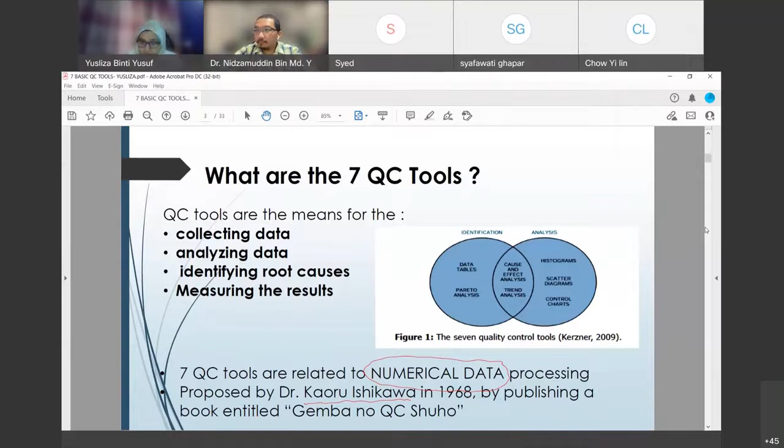If we look at the history of these 7 QC tools, they were proposed by a Japanese, Dr. Kaoru Ishikawa, in 1968. Dr. Kaoru proposed these 7 QC tools in his book, Gemba no QC Shuho. Based on this book, he proposed the 7 QC tools to be used and practiced by Japanese firms at that time.

So for today, the 7 basic QC tools we will go through are: first, check sheet; then histogram; number 3 is Pareto analysis, sometimes also called a Pareto diagram; number 4, the most popular, is the fishbone diagram, also known in some books as the cause and effect diagram; followed by the scatter diagram, also known as scatter plot, flow chart, and control chart. This is the basic 7 QC tools introduced by Dr. Kaoru. For this 1 hour, I would like to share what each of these tools means and how we can use them to help solve problems in industry.

So we start with the check sheet. Even though we say it's only a check sheet, a very simple check sheet, for me it is a very valuable tool for us to dig information from our production line. If you are involved in developing a check sheet to monitor, check quality, or perform any study, please do a proper study to create a very good check sheet so that we can have so much information from it. We can easily get information based on the check sheet if we properly design it to collect the data.

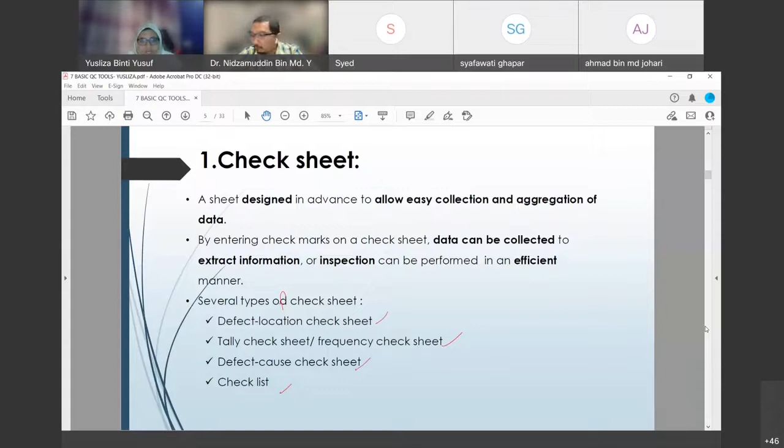So the inspector, when doing the inspection, when he finds a defect, he just puts a sticker or any shape to identify each of the defects on the check sheet given.

So you can see how easy it is for us to get information about the current production status and performance of producing the part based on the check sheet, if we have this kind of check sheet. It depends on the suitable environment and the parts of the product we produce.

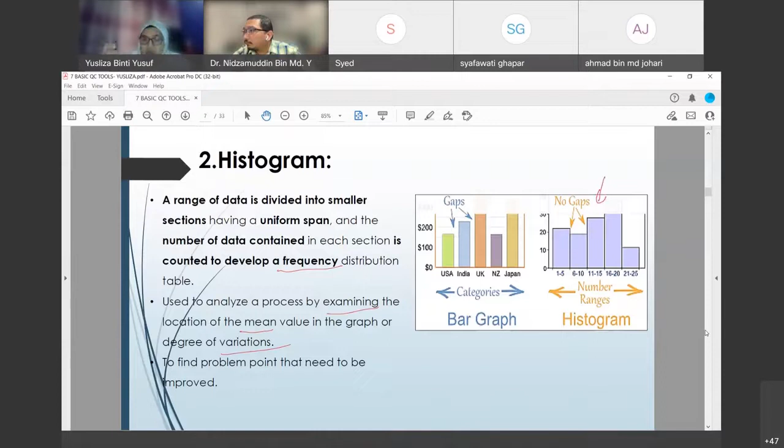We can see that the histogram is different from the bar graph, because histogram refers to the number of ranges on the x-axis, compared to the bar graph which is based on category on the x-axis. So when we plot the histogram, how it will look will totally be influenced by our data itself.

Okay, so as I said just now, we construct the histogram to monitor where the mean value is and to know what is...

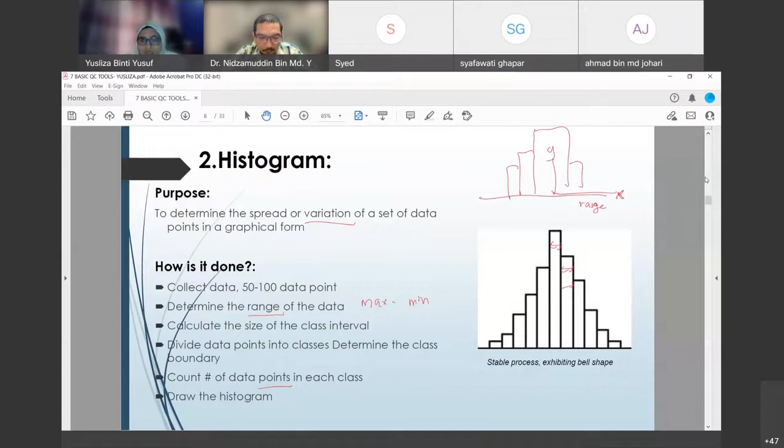So what are the benefits and the input we can get when we draw the histogram? We can glance at the variation, as I said before, because we want to reduce or minimize the variation. Based on that, we can also know our process behavior based on the shape of the histogram we have. Maybe this kind of shape, for this we have two peaks, so we call it a bimodal type of histogram, because the shape and size of the histogram will help us identify whether there is any hidden source of variation or not. From that, when we have the information based on the data we have, we can start the improvement activity to do the process improvement in our production line.

So for histogram, the ideal one should have a bell curve, bentuk macam ni kan, bell curve. The center of the histogram, the value of the mean, must also equal the median value. So that we consider as a stable or balanced histogram, which we call a unimodal histogram.

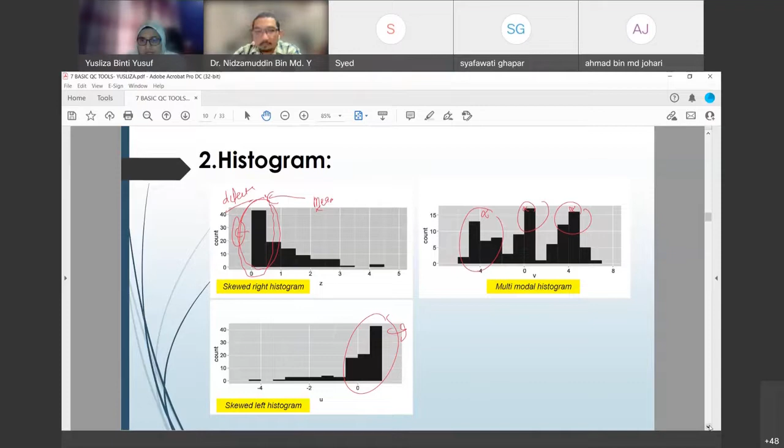Okay, so the third one is the Pareto analysis, or the Pareto diagram.

Dr. Nizam, I think we have a question in the chat. Should I answer right now or after this? Oh, okay. Actually, both ways. I don't want to disturb your presentation, but since it's already on the topic now, one of the questions is: is Minitab a recommended software to use for SPC analysis?

Minitab. For me, Minitab is recommended because it is easy to use. Minitab has a lot of functions, meaning it has sections where we can calculate SPC, process capability and so on. So in UTeM, in my faculty especially, Fakulti Teknologi Kejuruteraan Mekanikal dan Pembuatan, we subscribe to this Minitab software, and we also embed it in our students' lab sessions. So our students do the SPC analysis using the conventional method, calculating by hand, and also using Minitab.

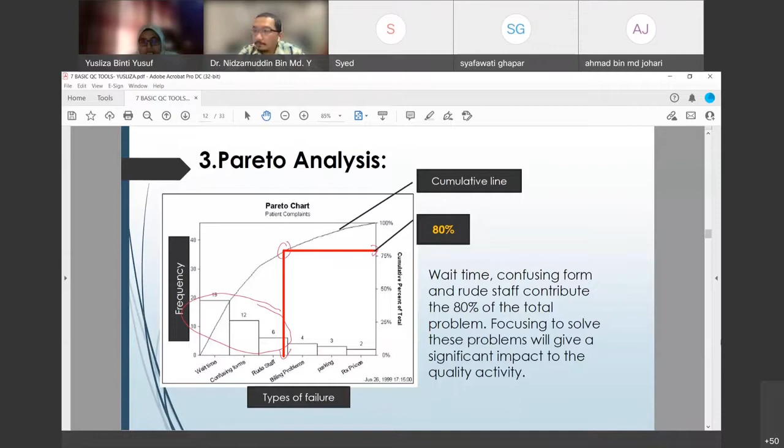That's what 80-20 means. So how to construct the Pareto diagram? Because we say that the Pareto diagram is the rank, the first step when we have a lot of data is to do the sorting, the ranking. Then we sort the data based on the rank, highest to the lowest, and then we calculate the percentage of each defect we have. Then, because we want to have the cumulative line like this, we have to determine the cumulative percentage.

So basically we can use the Pareto chart when we have a few types of defects or problems and we don't know which one contributes more problems to us. We can find that out when we do the Pareto analysis, because it uses the 80-20 concept from just now. So that is the benefit or the usage of the Pareto diagram.

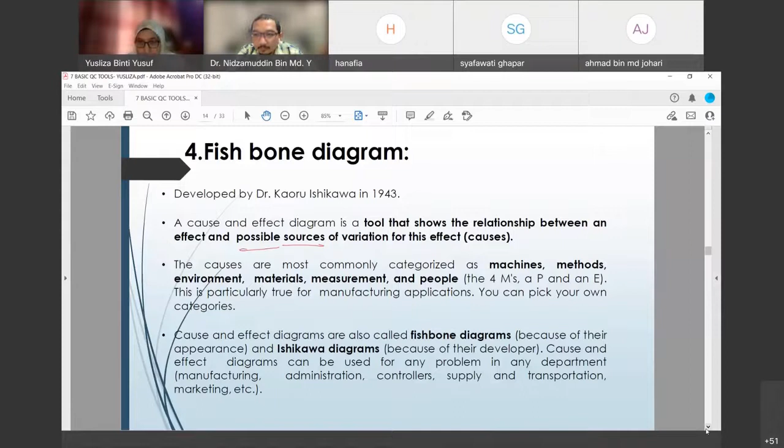But this is not fixed. You can change it based on the situation at your industry. I don't say that you must use this kind, that it is fixed. We can change it based on our requirements to suit our process. Basically, we use this to ensure that nothing is missed when we do the brainstorming process. We can form a team so that each of us can contribute ideas on what may be the root cause of the problem based on each of these categories. So this is a fishbone diagram.

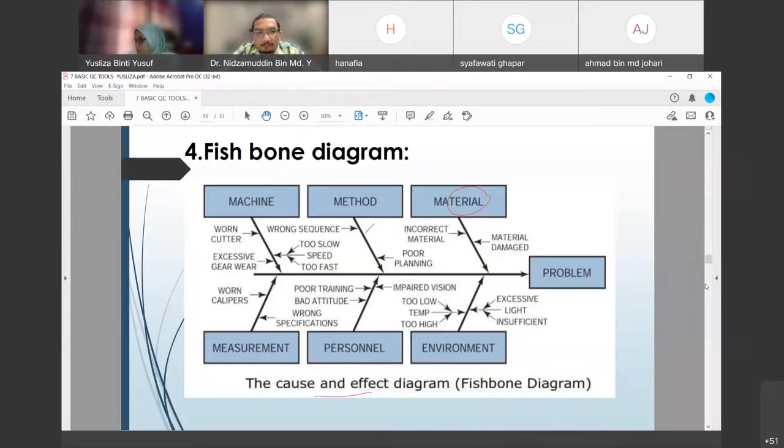Okay, so fishbone diagram, when we want to clarify, to identify what is the cause and what is the effect. Okay, so effect ni problem lah. Okay, so we can use this fishbone diagram because after we have one complete diagram, we can clarify which is the most

contribute to that problem. So from that also we can listkan, yang mana yang paling critical, the most critical, so that we can take the necessary action, the countermeasure based on the root cause that we have identified in our fishbone diagram. Okay, so that is number 4.

So now we move to the QC tools number 5, which is scatter diagram. Okay, so let's see, in our production line, we have data with maybe 2 variables or maybe 3 variables. So we don't know what is the relationship between this data. So the easiest way to see is we construct the scatter diagram.

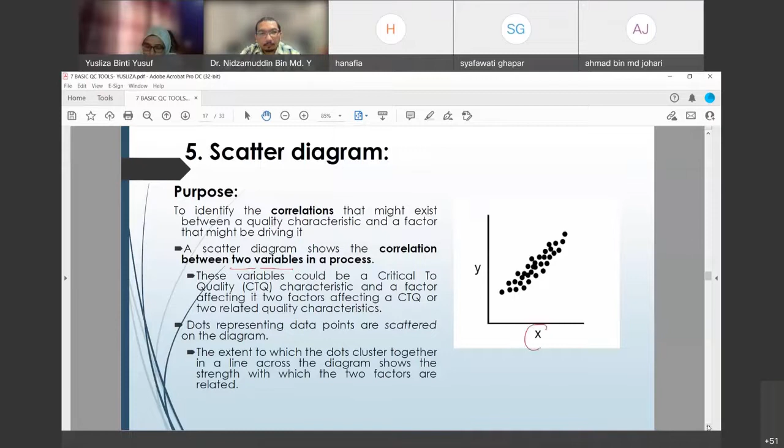Okay, for example, we have data with 2 variables, variable x, variable y. So what is the relationship between these 2 variables? So the easiest way to see, is there any correlation ataupun apa hubungan antara dua data tersebut? So we perform a scatter diagram.

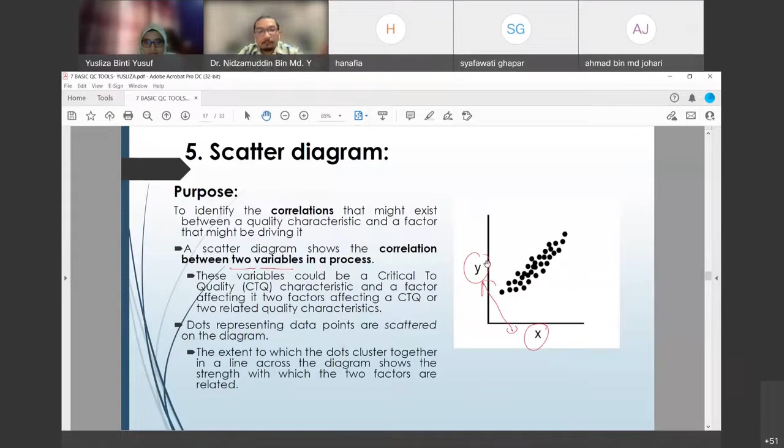Okay, so basically, if we have constructed a scatter diagram, we can make a conclusion whether our data have a positive correlation or negative correlation like this, or maybe no correlation at all. So we can say that the scatter diagram can help us to identify the strength or the relationship between the 2 variables that we have. Maybe the cause and effect information from that, or any other relevant information from our data.

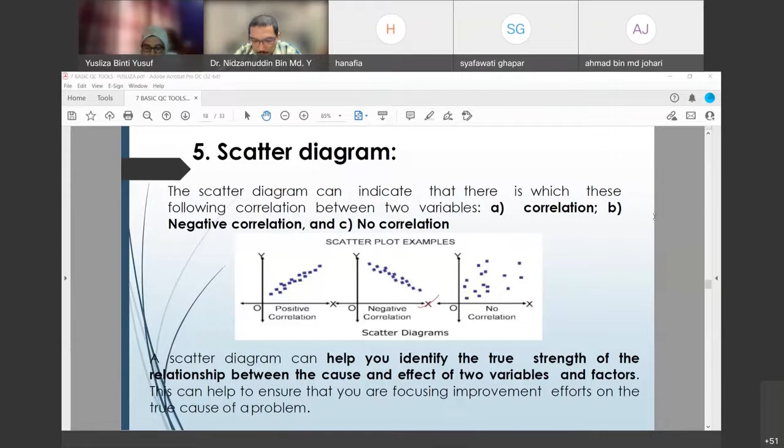So saya rasa yang ni ada contoh. So let's take this example. For example, this is the ice cream shop. So they collect the data based on the daily temperature and the sales.

If they do not perform any graphical visualization of the data, maksudnya tak buat graph, tak buat apa, based only on this, tak ada siapa pun boleh bagi conclusion apa perkaitan, what is the relationship between temperature and sales. But if we perform the scatter diagram, because we have two variables, temperature and sales, we can say that we have a positive correlation. Means that our sales get higher when the temperature is high.

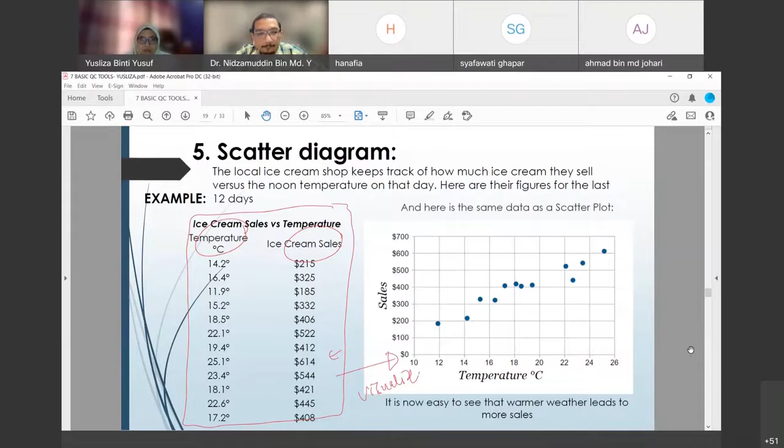So make it visual, okay? Making it visual is easier to interpret the data. So that is the usage of the scatter diagram. So rather than having only this kind of data in the form of numbers, why don't we visualize it? So bila kita visualize kan jadi bentuk macam ni, it's easy to interpret. Oh, we have a positive correlation. When the temperature is higher, our sales also increase. Macam tu. Okay, so this is the example of how to use the scatter diagram.

Okay, number 6 is a flow chart. So flow chart also is another part of the 7 QC tools. So basically, we always use this flow chart to show the flow of our product or service, step by step, so that we are not missing out one of the important processes in our industry or in our procedure and so on. So it's easier to understand how the process will go based on the flow chart. So flow chart will help us to easily visualize our entire system.

So it is advisable for each process to have its own flow chart, so that from the flow chart we have constructed, we can know where is the critical point, where is the bottleneck of our process, what common problem is contributed by which process, so we can easily pinpoint the actual step or actual process station that contributes to the problem. Okay, so even though it looks like a simple flow chart, it's a very important tool to show that we are properly arranging our process.

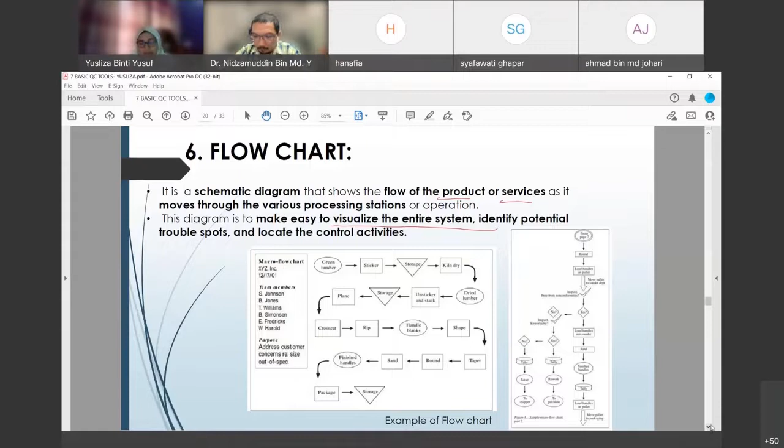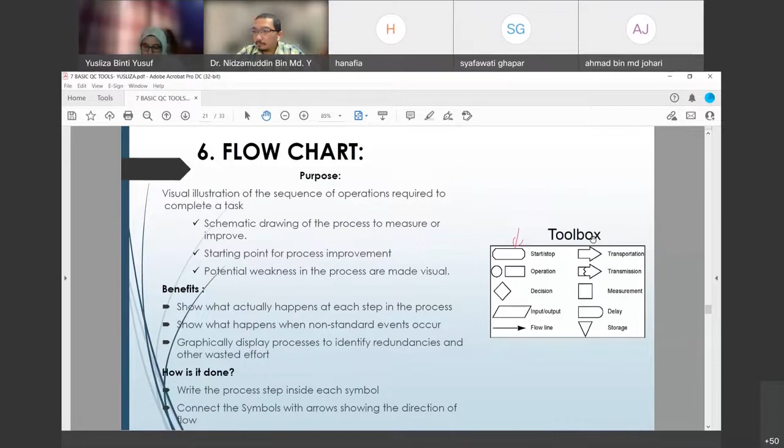Okay, so to construct a flow chart, we have to use the specific toolbox, to make it standardized, so that we know whether this is a critical process or not. So commonly it is identified by the types of toolbox we use. Okay, what's special about the flowchart is it is recognized, it has one main major function in ISO documentation.

Okay, so if we go to the ISO site, when we want to construct the flowchart, each of these toolboxes, whether it's a square, a diamond, or a round shape, will define what the meaning is. For example, a diamond shape refers to decision, so there must be a result that comes up from this process.

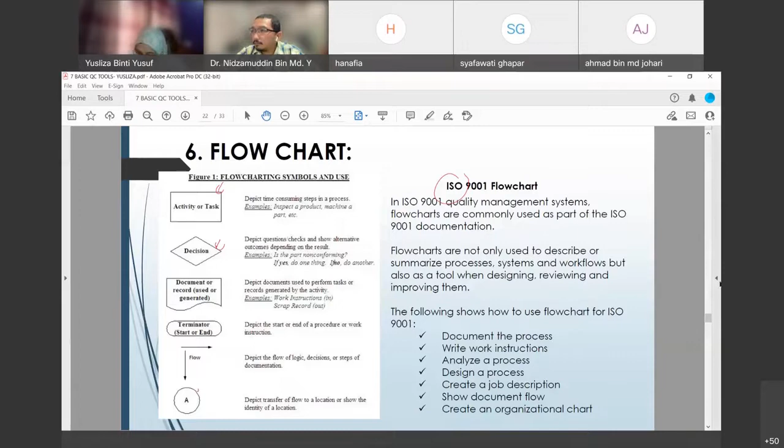So it's more standardized, so that people can easily know what kind of toolbox we have to put for each process. So it's standardized and easy to interpret. So this is for the flow chart. Okay, and then the last one is the control chart.

So the control chart also involves calculation, same like the histogram, scatter diagram and Pareto diagram. The control chart also involves a calculation to construct it. The reason we perform the control chart is because we want to check our process condition, whether it's stable or not, to know whether our process is under control or out of control. So we have to perform the control chart.

So in a control chart, there will be a central line, an upper control limit, and also a lower control limit. So this is the basic item that must be in the control chart: a central line, upper control limit, and lower control limit. We can use this control chart to control our process. We want to predict whether any expected changes will occur, also based on the control chart.

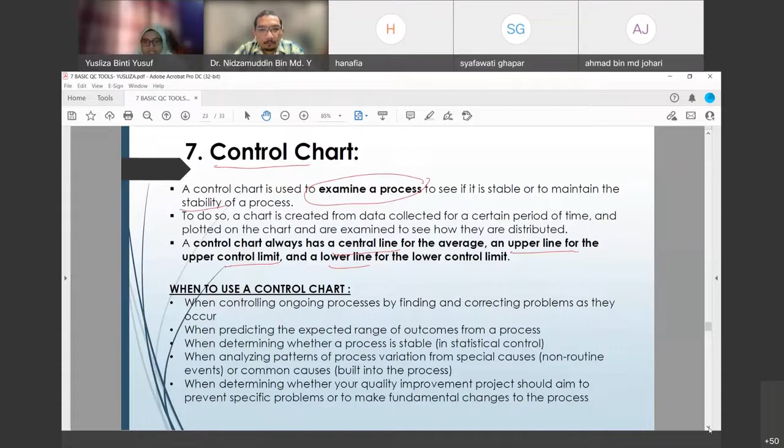We also can use this control chart to check whether our improvement project performs well, whether it functions or not. So we can also use the control chart to monitor the project that we have proposed to do. Okay, so that is for the control chart.

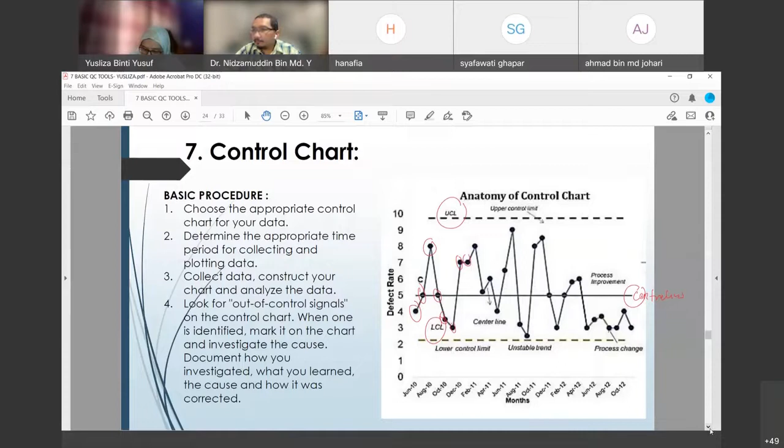So this is the basic control chart. Like I mentioned just now, there is a central line here, an upper control limit and a lower control limit here. This is the data that you are collecting. So you can see whether your process performance is okay or not based on the control chart that you have constructed. So basically we can use the control chart to see if there is any problem in our production line.

For example, after you construct a control chart, you see that your data is like this. Why does it suddenly increase, going upward? You have to look back at your production line. Did something happen? Why is the data consecutively increasing? And why is it increasing but in a steady trend? Just now it was a significant increase. Or why is it recurring? Sekejap naik, sekejap turun, sekejap naik. So we can have a lot of information once we construct a control chart.

Ataupun we can see that our data has two populations. So all this will give us many meanings about what is actually happening in our production line. So this is the usefulness of constructing a control chart in our production line.

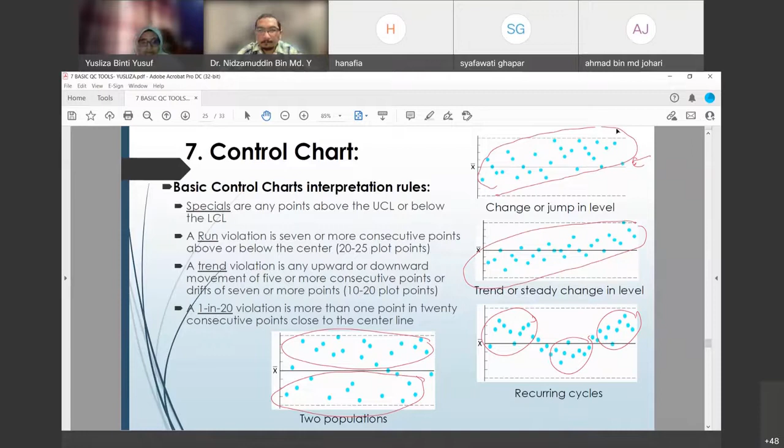Like I said just now, you can't simply use any type of control chart that you prefer. You have to choose the correct control chart based on the type of data that you have, because this is the basic, and we have around 7 types of control chart. So how do you know which one is suitable for your production line? So it's based on...

Dr. Yusliza, there is a question in the chat: how to determine the UCL and LCL? Okay, Encik Sarizam, there is a formula to calculate the upper control limit and lower control limit.

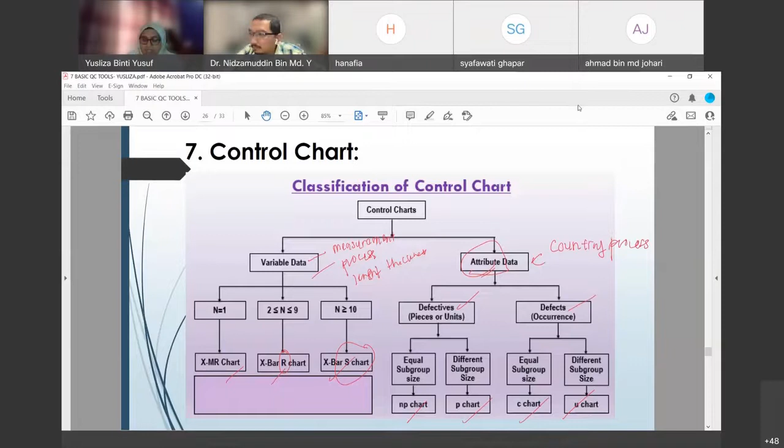Attribute data is data you get from the counting process. For example, your operator does the sampling process, he picks 100 pieces of sample, and then he performs the inspection. From the inspection, he says 8 are defects. They count, 8 are defects. So this is attribute data. Okay.

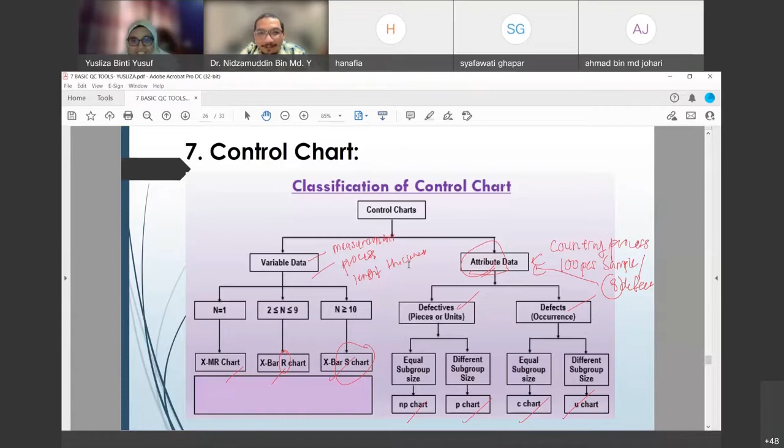Okay. So that is the basic 7 QC tools. Kita ada sikit masa lagi, so let's look at an example, a case study on how to use the 7 QC tools. Let's say this industry produces bicycles, and they found defects such as corrosion, scratch, incorrect hole alignment, dent, macam-macam. They face a lot of types of defects, so they want to do process or quality improvement to reduce all these defects.

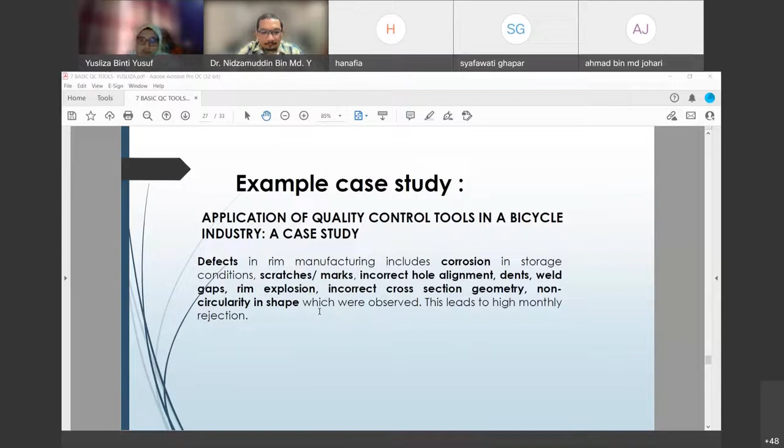So what can they do first? Sebab they have a lot of types of defect, yang dia sendiri pun tak tahu which one actually contributes more to their problem. So they have to identify the problem using the Pareto diagram, 80-20. So he can say that actually dia punya problem is only this. If this company can solve this portion, they can solve their quality problem. So first, they can use the Pareto chart to prioritize the main crucial activity they need to focus on.

Next, when they know the main defect that contributes to the problem, dia dah dapat puncanya, they want to collect the data, so they can use the fishbone diagram to get the information and do the analysis. They can collect information from their members, from the production line, and so on.

When they get the information, they also want to do the analysis. They can use the histogram and scatter diagram, because these visualize the correlation in the data they have, giving more input. Then they can propose countermeasures based on each bone of the fishbone tadi. Katalah A1 problem, so what is the countermeasure? They suggest a countermeasure for each bone of the problem.

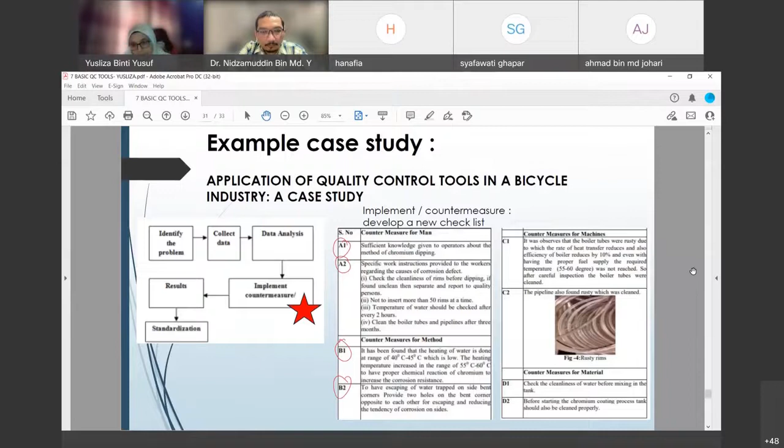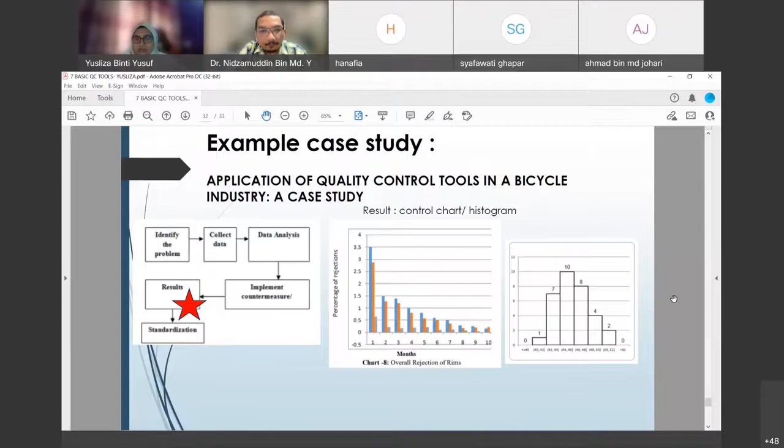Then they implement the countermeasure, and to monitor whether it's accomplished or not, they can use the control chart, or maybe the histogram, to verify whether the action taken reduces the defect. So this is an easy example of how to use these 7 basic QC tools when we have a problem in the production line, in producing the product or process.